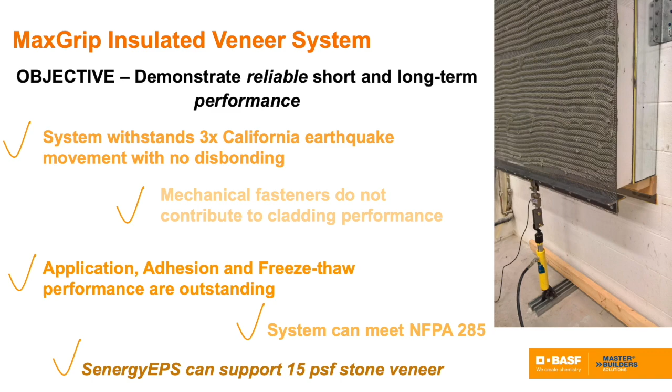173 pounds. Standing on it.

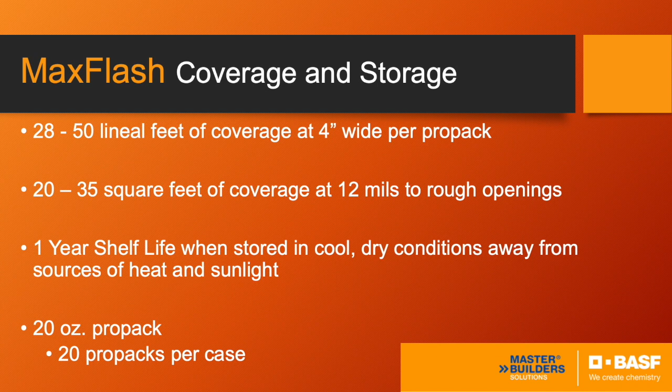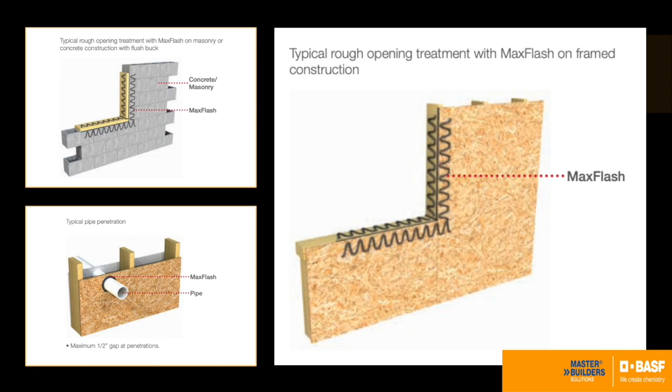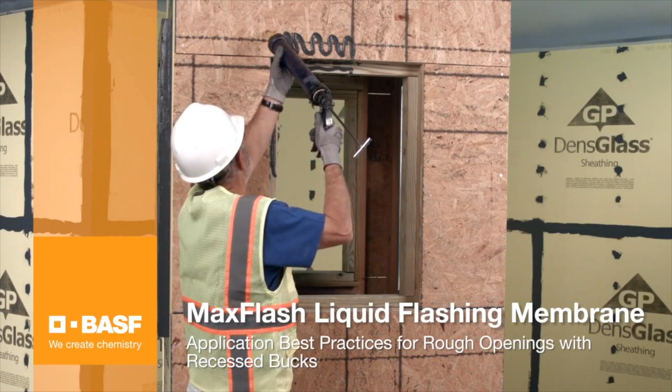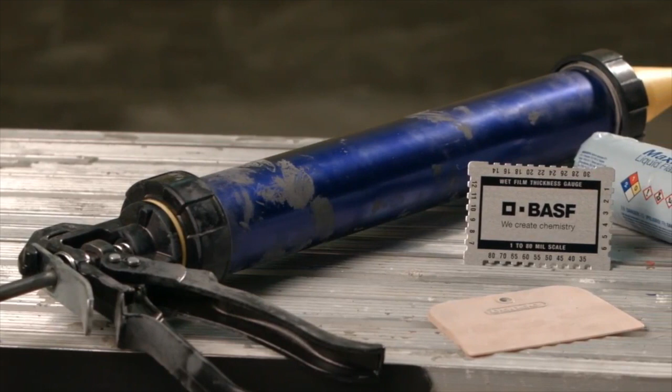Today we will demonstrate best practices for applying our BASF MaxFlash liquid flashing membrane to a window rough opening with recessed bucks. You won't need a lot of equipment to do this. For today's application, we will use a 4-inch plastic spatula, a mil gauge, and a standard 2-inch 20-ounce sausage gun.

We will apply MaxFlash to a rough opening with recessed wood bucks onto wood framing and oriented strand board sheathing. The same principles apply to flashing gypsum and cement-based sheathing on steel studs and to concrete masonry construction.

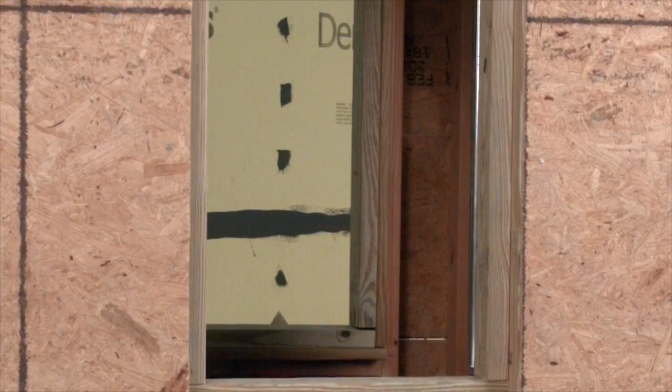Before starting, confirm that the bucks have been installed correctly and the sheathing has been installed per the sheathing manufacturer's instructions. Large gaps and poorly cut sheathing can reduce MaxFlash coverage. Unsatisfactory conditions should be remediated before applying MaxFlash. Brush away any dirt and dust that may have accumulated on the rough opening. It is important that dust and debris is removed before applying MaxFlash.

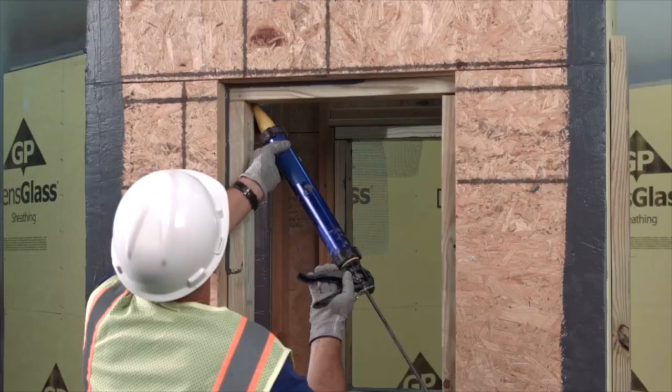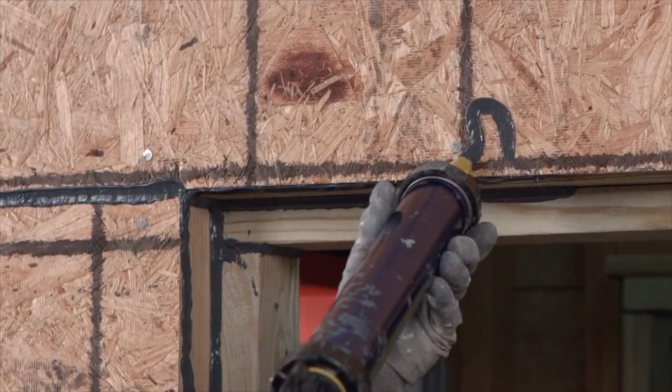When the opening is clean, begin by applying a bead of Max Flash to an inside corner of the rough opening. Run a bead of Max Flash over areas where wood bucks meet sheathing and between wood bucks. Now apply a bead of Max Flash in a zigzag pattern at a window corner across the window return, across the buck, and onto the OSB sheathing. Using a zigzag pattern helps Max Flash spread easily and consistently across the rough opening at the right thickness.

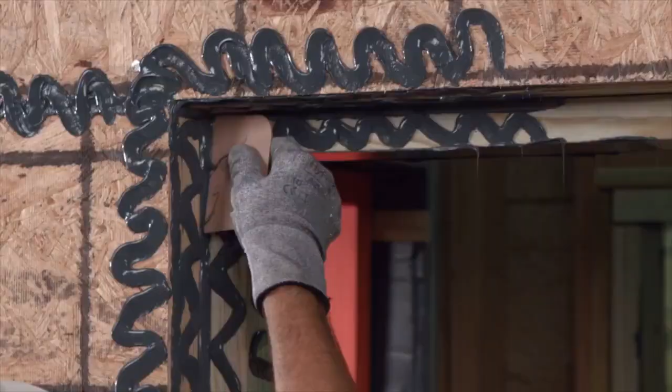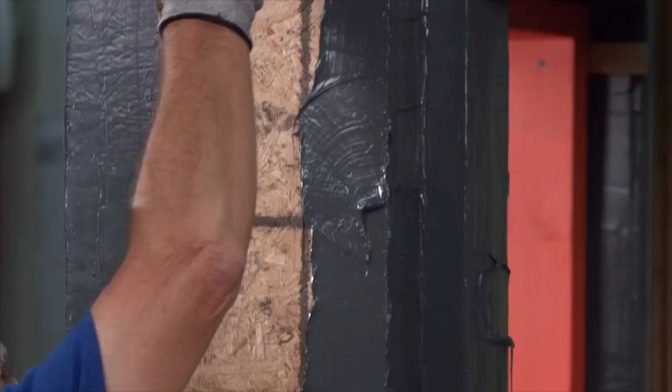Next, using the 4-inch spatula, spread Max Flash across the buck and onto the face of the wall, forming a continuous, void and pinhole-free membrane that is 12 to 20 mils thick. Extend Max Flash at least 4 inches onto the sheathing. Pay close attention to the outer edges of the bucks and sheathing, making sure they are fully covered and the entire application is pinhole-free.

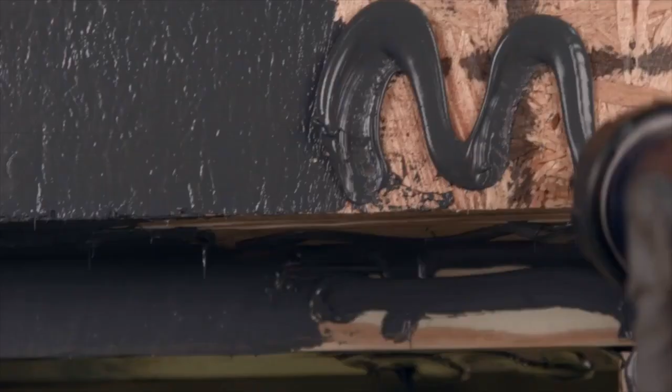Apply Max Flash using the same technique to the head, jambs, and sill. Apply a bead of Max Flash where the bucks meet the sheathing and between bucks. Then apply Max Flash in a zigzag pattern across the return, buck, and sheathing. Spread Max Flash to a 20 mil thickness on sheathing joints and to a 12 to 20 mil thickness on rough openings, creating a continuous, void and pinhole-free membrane. Check thickness at regular intervals to ensure that the applied thickness is uniform and correct.

Max Flash is a moisture-cured product that will cure faster in hot, humid conditions. Apply Max Flash in limited amounts so you can finish spreading it well before it begins to cure. You can apply wet Max Flash over areas where Max Flash has already hardened. Max Flash will bond to itself and become continuous, so you can apply Max Flash in amounts that are appropriate for job site conditions.

When Max Flash is dry to the touch, it is ready to be integrated into a BASF fluid-applied air-water resistive barrier system. To recap, while application of Max Flash liquid flashing membrane is fast and easy, it is important to ensure that Max Flash is applied in a continuous, void and pinhole-free manner to all places that need to be flashed. Max Flash extends to the back of the window return, across the bucks, and at least 4 inches onto the face of the sheathing.

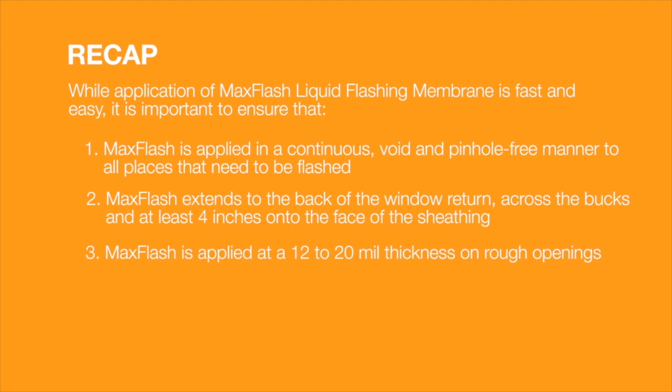Max Flash is applied at a 12 to 20 mil thickness on rough openings. Max Flash is applied at a 20 mil thickness on sheathing joints. Max Flash is spread to its final thickness well before it begins to cure.